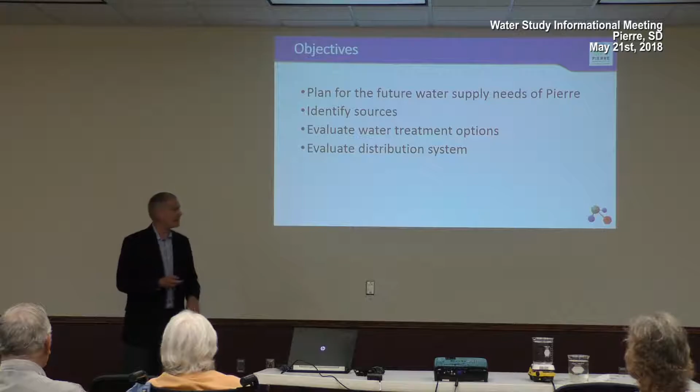Whenever a plan is made, you have to have an idea of how big it should be. The size of a facility is dependent upon the number of people using the water, or the water consumption in the community. So there has to be a planning period. In the case of this study, the planning period was 2045 as the planning date.

Currently the census population is about 13,600 people. Looking at population trends of the community and the county, it was agreed by the team to use a design population in the year 2045 of 16,100 people.

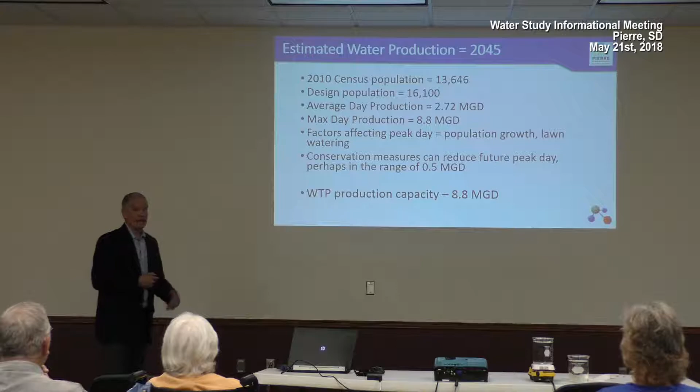At that time, the average day consumption was estimated to be 2.72 million gallons per day, with a maximum day consumption or production of 8.8 million gallons per day.

There are factors that affect that maximum day. You can see the maximum day is almost 3 times what the average day is. The main factors that affect that would be population growth, but primarily in this community it's the summer water use - it's the lawn watering that occurs during the summer that causes a peak demand.

As part of the teamwork, we discussed what can be done to try and reduce that peak day demand. We discussed various conservation features that could happen in the community to manage water demand, which could reduce that peak day anywhere between 0.5 and 1 MGD, just depending upon the policies put in place to manage water demand.

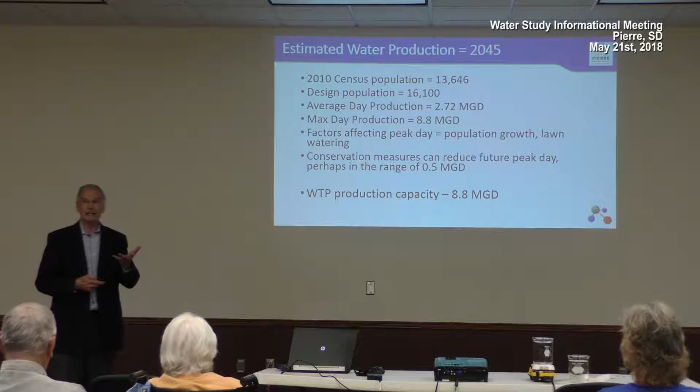But in the end, it was determined to design the peak demand for the water treatment plant, the peak production, to be 8.8 MGD. A part of the evaluation is also to look at the capabilities of the existing system. The city of Pierre has 12 wells located along the river.

Well 11 is down on the southeast side of town here by itself. There's a series of wells arrayed along the shore of the river near the park system there, and then there's 4 wells out on La Framboise Island as well.

These wells pump water into the lowest part of the distribution system. That's, as you drive through town, you recognize you're sort of on the low part of town. And they pump water into the Harrison and Euclid reservoir. The water level in that reservoir sets the pressure for the lowest part of town.

There are pump stations at both of those reservoirs that pump water to the next pressure zone, which we call the airport pressure zone. The water pressure in that zone is established by the water level in the reservoir at the airport location. There's a pumping station there that will pump water up into the highest zone, or the highest elevation of the community, whose water pressure is set by the water level in the Snake Butte Reservoir.

So there's essentially 3 pressure zones in the community. One down here by the river that's pumped into by the wells. The next one, in this area of town, pumped into by pumping stations at Euclid and Harrison. And then this upper pressure zone serving these folks up here, and also potential new customers out there, pumped into by the airport pumping station.

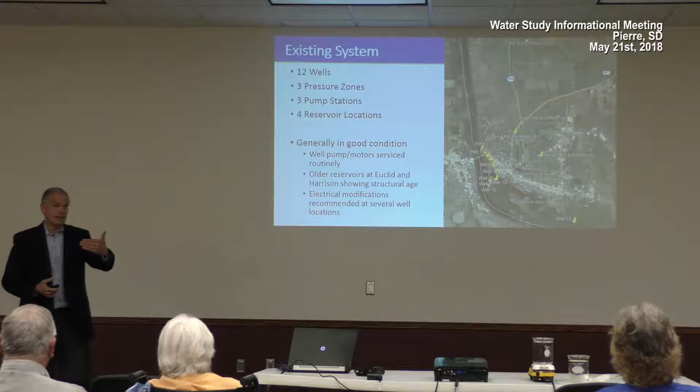As we reviewed the condition of these facilities, we recognized they're generally in good condition. They've been kept well by the community with good operation and maintenance procedures. There's a couple of older reservoirs, one at Euclid and one at Harrison, that show a bit of structural age, and if they continue to be used, will likely need some rehabilitation.

Finally, there was recognition of electrical modifications that should occur at the wells to keep them up to date and enable them to continue operating into the design period if they were continuing to be used. So basically, that's the evaluation of the existing system.

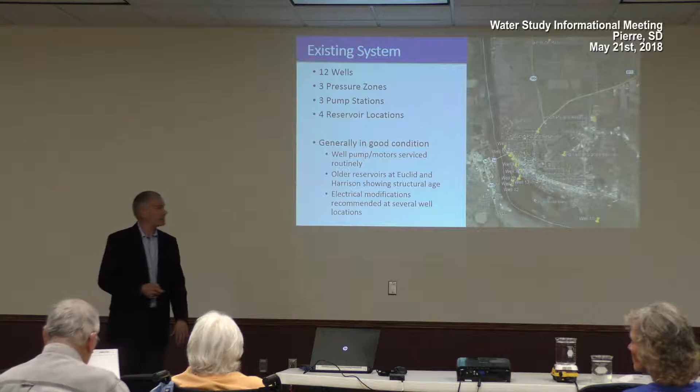We're all curious about water quality, so we needed to summarize that too. There are four main things to talk about: manganese, hardness, sulfate, and total dissolved solids. As water moves through an aquifer, the soil formation dissolves things into the water. Calcium and magnesium, which make up hardness, dissolve from the aquifer material, and manganese and sulfate dissolve as well. These things present in the water result from its history in the aquifer, and all of those dissolved minerals contribute to the total dissolved solids concentration.

It's just dissolved matter. If you put that water on your stove in a pan and let it evaporate, you get a white residue at the bottom. That residue is the dissolved solids remaining in the water—now they've become precipitates, okay?

There is a general trend in the well system here in town to higher total dissolved solids. Wells 6, 7, and 11 have trended to the highest concentrations. In fact, if the wells continue to be used, we would recommend those wells be discontinued and different wells put in place to replace them, because the concentrations are up in the thousands of total dissolved solids.

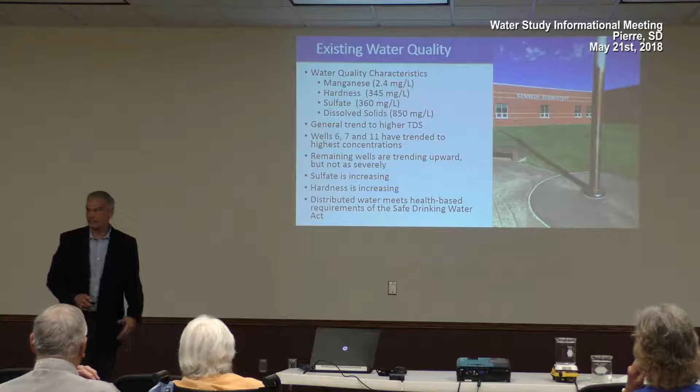However, there is treatment, which you'll see on the next slide, to make the treated water meet the health-based requirements of the Safe Drinking Water Act. So the water is safe to drink in terms of those requirements—it just has dissolved substances that cause it to be a little bit troublesome in some locations for use. So what happens at the wells to make it safe to drink?

There are little treatment systems provided at each well. Fluoride is added at some wells, with the capability to keep a consistent fluoride concentration in the distribution system. There's a sequestering chemical to tie up the manganese and the little bit of iron that's there, to try and hide its presence from the water. It holds it in solution for as long as it can, and eventually, as time goes on, it starts to release—and then you see the released version of that. There's also chlorine that combines with the ammonia present in the groundwater to form a chloramine residual, which is the disinfectant residual in the distribution system.

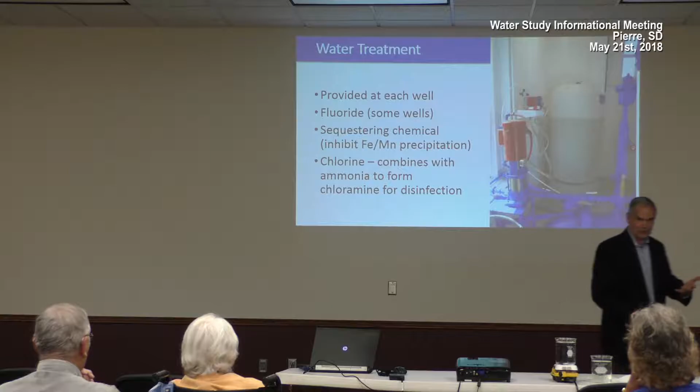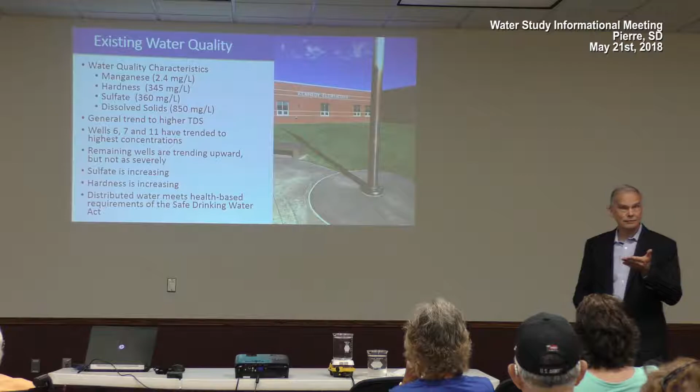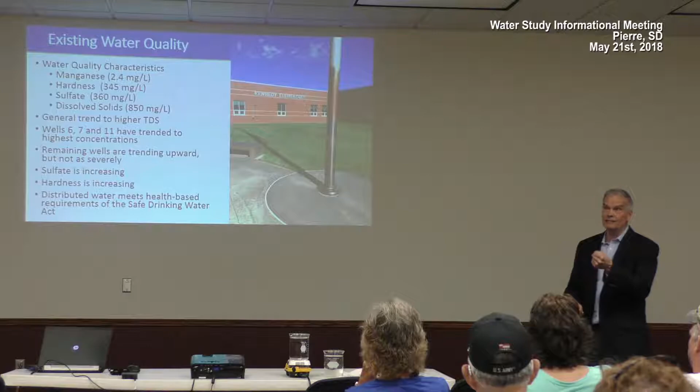Before I go on, I want to show a little experiment to demonstrate—you guys have seen what the water does when you spray it onto the landscaping, you see this brown residue. If we treat this water to remove that, we want that reaction to happen very quickly. We want to create the particles you see inside the treatment plant and make them precipitate so we can filter them—so we're undissolving the manganese very quickly.

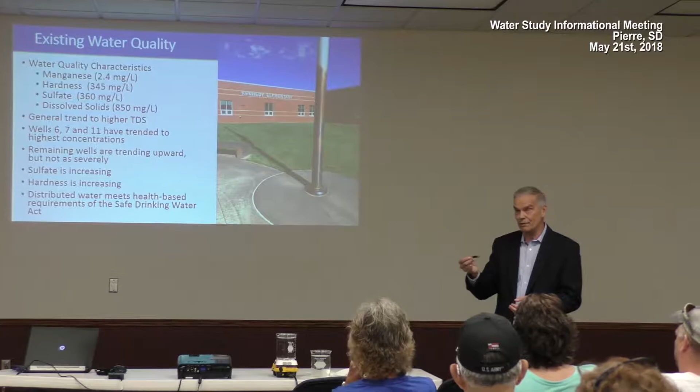One of the chemicals we would use to do that, if chosen as an alternative, is potassium permanganate. So I'm going to take this sample of well water that's stirring here on my stirring plate—it looks pretty clear when you pump it. This was actually freshly pumped this afternoon, right Derek? So it looks pretty clear. If you let this sit out for a day or two, it would start to turn brown, or if you just spray it out over time, you'd see that on your sprinkler systems as well. What I want to do is simulate what we do in a treatment plant to make that happen really quickly.

So this potassium permanganate actually looks pretty nice when you put it in the water, but you see pretty quickly it's going to turn brown. It's oxidizing the manganese, transforming it from a dissolved form to a particulate form. We want that to happen just as quickly as it's happened.

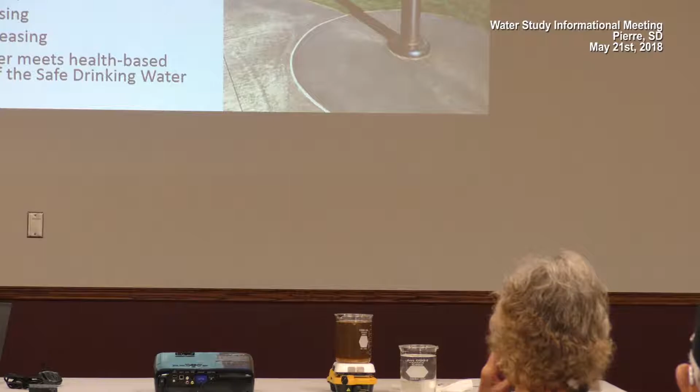Actually, the manganese has already been oxidized here. As we continue to stir it, the little particles of manganese will start to floc together to form larger particles that can be filtered out in a treatment facility. So that's how that would be removed in a water treatment plant, just like we're showing here. By the end of this presentation, you'll see particles that look like they'd be filterable.

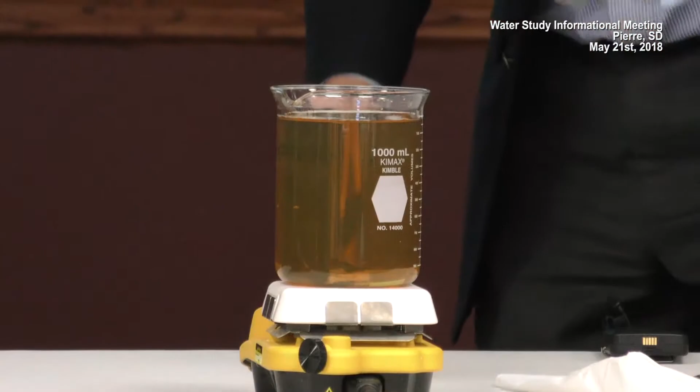Just as a matter of comparison, this is the river water, and you can see it looks clear as well. The river water is excellent quality, and we'll talk about that in a couple of slides. If we would put that permanganate in the river water, it would stay pink because there's no manganese there to react with that chemical, so the chemical would not be consumed. It would just stay pink, and people drinking that would complain because the water is the wrong color, right? You expect it to be clear.

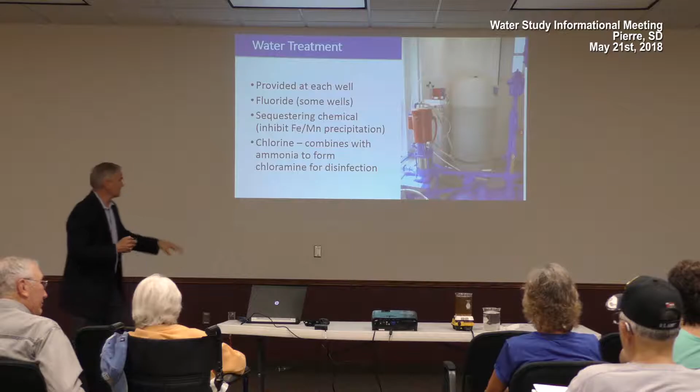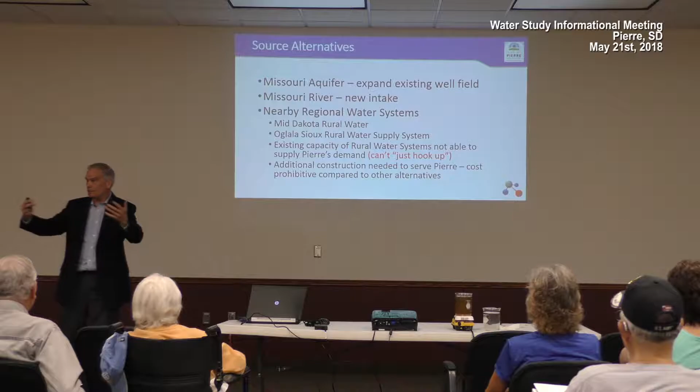So we talked about the treatment provided at each well. There's 3 chemicals that are added to the water. That's really the existing system, how the water is prepared in town and put out into the distribution system.

Our next step was to look at different sources that could be used for the city of Pierre. Of course, you have the existing well field in the Missouri Aquifer. That aquifer is influenced by water levels in the river, and we think there is some recharge from the river as well. But as a result of that formation down there, manganese dissolves, and so you end up with high manganese concentrations. Also, another source might be the Missouri River itself. The city could build an intake and draw water from the river, treat it appropriately in a treatment plant, and then use that, similar to what Mid-Dakota does up north of town, or the Mni Wiconi-Oglala Sioux water supply system does north of Fort Pierre. They both use water drawn directly from the Missouri River.

So what about those regional systems? A question is: is there capacity available? Can they bring water to the city of Pierre? We talked with the managers of these facilities, one being Mid-Dakota Rural Water, just northeast of town, and the Oglala Sioux system north of Fort Pierre. It turns out that the existing capacity of those systems is pretty much spoken for by their own customers. In other words, there's not excess capacity to take water from those facilities and bring it to Pierre.

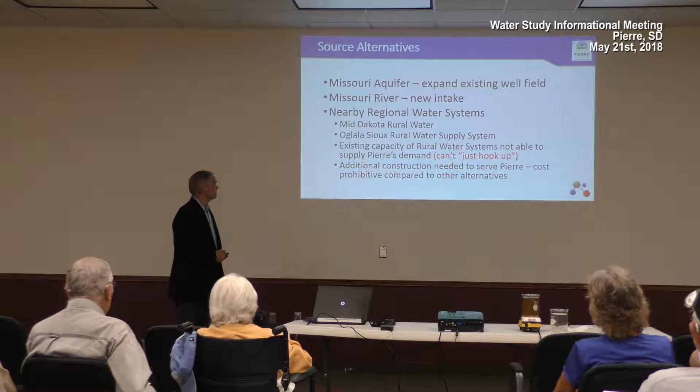All right, so let's compare the quality of the aquifer with the river. I've highlighted the values that we've had before on the prior slide: manganese in the range of 2.4 to 2.5, hardness about 345 - some of you might be familiar with grains of hardness, that's equivalent to about 20 grains - sulfate about 360, and dissolved solids about 850. These numbers you saw before.

This would be the quality of the Missouri River treated and brought to Pierre. If you would take that water and treat it in a water treatment plant of the style we're talking about for the surface water alternative, the manganese concentration would be very low, 0.03 milligrams per liter, much lower than 2.4. The hardness would be about 15 grains.

It varies up and down depending upon recharge to the reservoirs. In the springtime, there's mountain snowmelt runoff that comes down through the reservoir system, and that dilutes the water concentration a little bit. Then as time goes on and that stops and you have rainfall events, there's a little bit of dilution as well. So there is a range of hardness concentrations, historically about 240 to 290, and we're just saying that's about 15 grains.

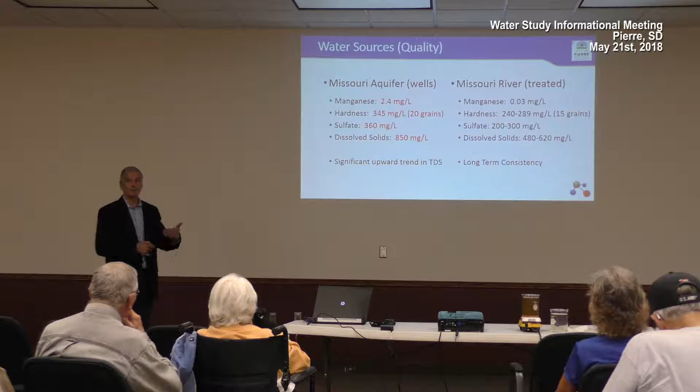The sulfate will range between 200 and 300, maybe 250 is a good average. And the dissolved solids range between 480 and 620, with a long-term average just over 500. So there's really a consistent water quality available from the Missouri River, from the reservoir or downstream of it. Whereas the Missouri aquifer that you're in with your wells has a bit of an upward trend of dissolved solids. If we would take this water...

Either source, if treated, needs to follow the requirements of the Safe Drinking Water Act. There's a whole list of rules that the system needs to abide by, and is abiding by right now. These regulations come in two flavors: a primary drinking water requirement, which is a standard set to protect public health, and a secondary drinking water standard, which is only a recommendation. But those values affect the aesthetic quality of water, making sure it doesn't stink, look bad, or have discoloration and things like that.

A system is required to meet the primary drinking water standards. Some of them relate to the bacteriological quality of water, that's the total coliform rule. The disinfection byproduct rule deals with the consequence of disinfection, since chlorine can react with things in water to form a carcinogen, and that's regulated as part of this rule.

The lead and copper rule influences the amount of lead or copper that could dissolve from somebody's home plumbing, like lead solder, a lead service line, or copper plumbing. Those can dissolve in aggressive water, so the lead and copper rule is there to protect systems against that and to make sure a public water system doesn't produce water that's aggressive or corrosive.

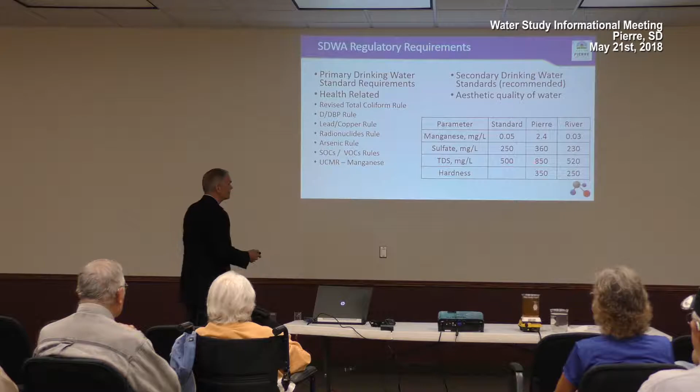The total dissolved solids will contribute to a taste in the water. It can also cause residues to be left, an excess amount upon evaporation if you're washing your car. Their suggested standard is 500. City of Pierre's water is currently at 850, and the river water is about 520, just over the standard. As a matter of comparison for hardness, for which there's not a secondary standard, City of Pierre water is 350, and the river water is about 250.

Again, these standards are secondary standards. They're not required, they're recommended. A community can choose to meet those standards as a possibility for water quality. It's totally up to the community.

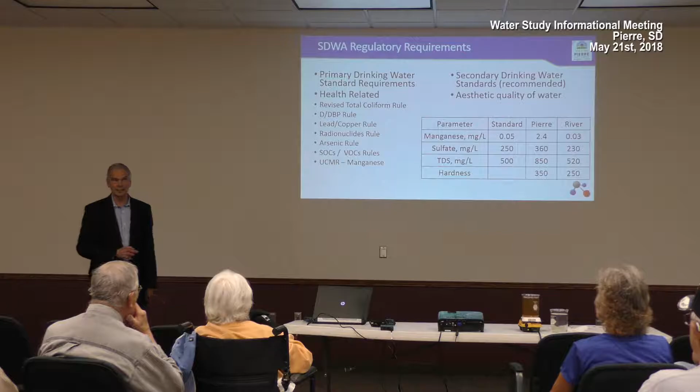Whereas the primary standards are required, and the city must meet those.

Let's come back to this UCMR - it stands for the Unregulated Contaminant Monitoring Rule, and it's the fourth version of this rule, just coming out here. It's in the time range of 2018 to 2020, where systems under this rule will collect samples. There's about 30 parameters that systems will sample for, and one of them is manganese. So Pierre is required to comply with this rule and collect samples for the parameters that apply to them, so they'll collect manganese samples in this 2018 to 2020 time span.

The EPA will take those data, along with other data related to public health concerns related to these parameters, and decide whether or not to regulate that parameter. That data will be used to inform future regulatory actions to protect public health.

So what are the questions they're asking? Well, would that contaminant have an adverse effect on human health? Second question, is the occurrence and concentration likely to cause public health concern? And then finally, will regulation reduce the risk for public water system customers? So if high concentrations increase the risk for a public health issue, then what is necessary in terms of regulation to reduce that risk to an acceptable level?

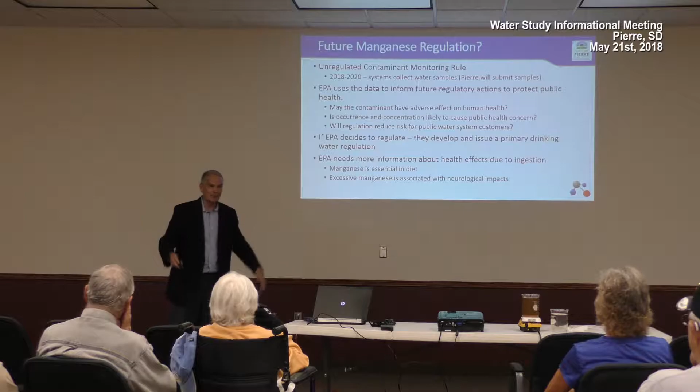In addition to that, the EPA has developed a health advisory level for manganese. They do this periodically for substances that are in the regulatory process. They've developed a health advisory, and there's information about that on the Pierre website - if you look at the water treatment plant section there's information about that. Their health advisory information's been out for quite a while, so if you need more information, want to read into this more, I don't have much more time to talk about this today, but you can certainly get that information there.

Okay, so here we are looking at alternatives for putting a treatment facility in Pierre. If a treatment facility is to be built, where could it go? There were 5 sites that were vetted by the team, the Pierre and AE2S team. One was up north of town, up by the firing range on property I think owned by the city, very near the Snake Butte tank. It would be a great site for a surface water treatment plant, obtaining the water from the river over here.

There's another site located just north of the furthest north residential area along the river. There's a little mesa up there - that's a potential site. And of course the intake would be just down the hill, pretty steep hill quite frankly, from there. So that's how that site would work again for a surface water treatment alternative.

And then there were 3 sites that were reviewed here in town. One is west of the Ramkota - we call it the Ramkota site, on this little green space right here. Then south of the bridge, we call this the Steamboat Park site, Site 4 - there was a space potentially for a treatment plant there. And then Site 5 is a nearly bare area just south of the Discovery Center on a lot there. Quite frankly, this site was very small, and because of its smallness would have been difficult to build a facility on, so it didn't receive a lot of favorable rankings.

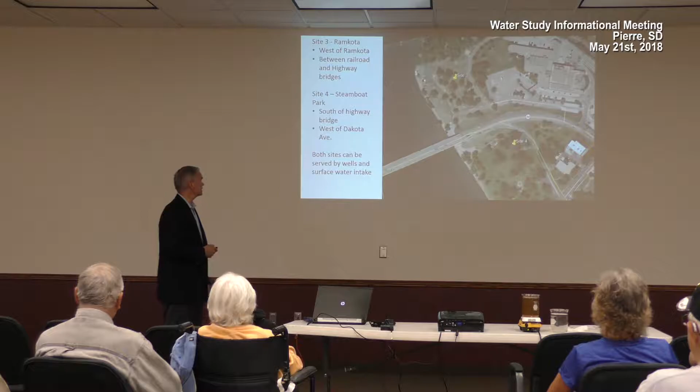So in the end, after all of this review, what would be the requirements for a treatment facility? One would be that it has to meet the requirements of the Safe Drinking Water Act, the primary drinking water standards to protect public health. The capacity of the facility must meet the design flow required for the system, meaning it has to treat water to produce 8.8 million gallons per day.

Finally, based upon public input and discussion amongst the team, it was decided that the treatment alternative must be capable of eliminating the discoloration from the water, to provide treated water with manganese less than 0.05 milligrams per liter. Quite frankly, this is very common for communities like Pierre to make a choice to do.

It's pretty normal across South Dakota to remove iron and manganese from water sources that contain it. For example, Brookings has high iron and manganese in their water source and has an iron and manganese removal plant. Aberdeen has a well source with iron and manganese, and their treatment facility handles that too. Watertown, same thing. The city of Huron is unique in that it has 2 water sources.

One is the Mid-Dakota system - they got into the planning stages early on, so they're part of that system. But they also have a groundwater facility that takes water from the Warren Aquifer, so they have a manganese and iron removal facility there too. It's very common for communities to choose to remove iron and manganese from the water. In fact, across South Dakota, it's more the normal than the non-normal for a system to do that.

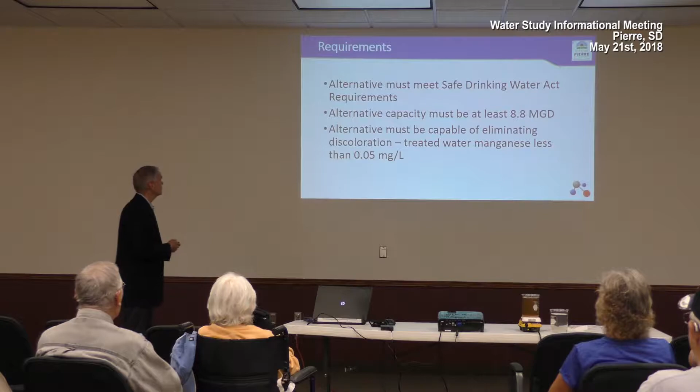So it was reasonable, based upon the Pierre community's desire to remove discoloration, to have the treated water manganese meet the secondary standard.

Given all of that, 3 different treatment alternatives were developed. One was to take the well water and remove the manganese using a process similar to what we started here - a chemical is added to oxidize the manganese to create particles that are then removed in a filter, a granular media filter typically used for public water supply. This would remove the brown color, but not remove any hardness, sulfate, or total dissolved solids - mainly focused on getting rid of the discoloration, which was a requirement.

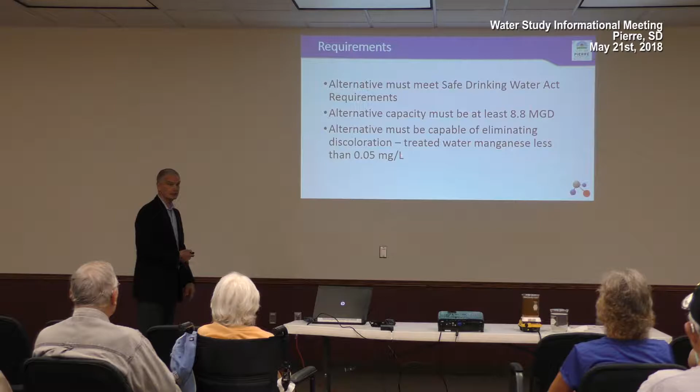A second alternative is to take that well water and do one additional treatment step: run part of it through a reverse osmosis system to remove some of those dissolved solids, and blend that RO-treated water back in with water that's been treated only for manganese removal, to achieve a water quality that matches up with the river water quality - a little bit of hardness removed, a little bit of sulfate removed, a little bit of dissolved solids removed, to match the river.

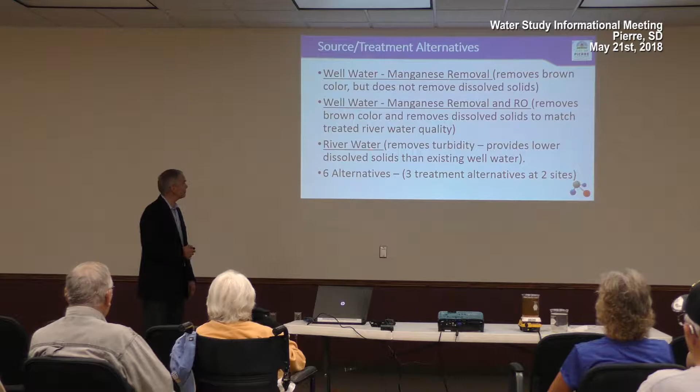So essentially you have 2 alternatives here, with the last one being a river water system that would produce the same water quality - one using the well water and the other using the surface water. The last alternative is to take the river water and just remove the small amount of turbidity that's there through a filtration process, then bring it out to the distribution system. This is different from the first alternative in that this water will have lower dissolved solids, lower hardness, and no manganese in it.

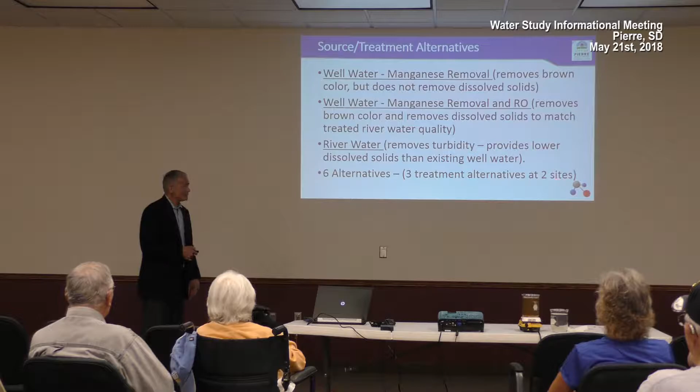Because there are 2 sites at which each of these 3 different processes could be developed, there were essentially 6 alternatives - 3 treatment processes at 2 different sites.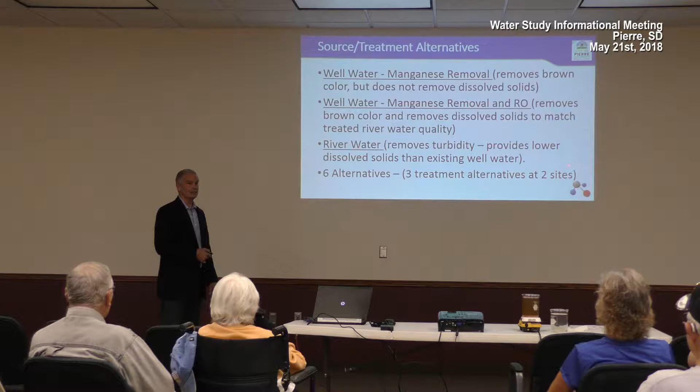Our team's job was to evaluate the costs of those alternatives. We look at this like the cost of you owning a vehicle. You buy it, new or perhaps newly used, new to you. Then over time, you do maintenance on that vehicle, so there's costs associated with the maintenance as well as the initial purchase cost. And at the end, it might have a trade-in value. We call that a salvage value.

In order to compare all of these against each other, we have to convert all of those costs to what we call a present value. It's called a present value cost analysis. It enables us to compare all the alternatives on an apples-to-apples basis. Some alternatives may have a higher construction cost but a lower operation and maintenance cost. You have to be able to compare that against an alternative that has a low construction cost but a really high operation and maintenance cost to find out what your real costs will be over time.

So that's what this was. In the end, the team went through an evaluation of that cost analysis, but also an evaluation of the pros and cons of each of the alternatives. This was a fairly extensive workshop that we went through with the City of Pierre folks to have them weigh in on their opinions on the pros and cons of each of these alternatives.

In the end, the team chose alternative number 6 as the recommended alternative, which is to build an 8.8 million gallon water treatment plant at the Steamboat Park site. That is a surface water treatment system using a process called ultrafiltration to remove the particles, organisms, and so forth that are in the surface water, disinfect the water, and bring it out into the distribution system.

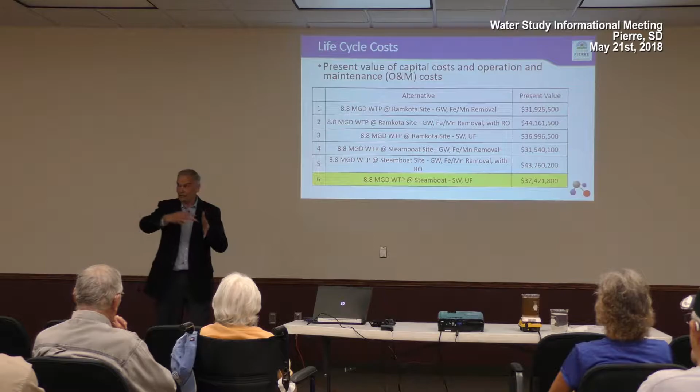The present value cost of that's about $37 million. Turns out that that's the construction cost too, about in that same ballpark, around $37 million to build it. Then if you look at the cost over time of maintenance and the salvage value brought back to the present value, it's about $37 million as well.

You might ask, well, what if we don't do anything? What if we continue on with what we have right now? Well, there's costs associated with that. As the city grows, you need more wells to meet the water demands of the community and little treatment facilities associated with that, each well. There's some wells that were recommended to be abandoned because of the bad water quality, so you need additional wells to compensate for those. And then you have to maintain and operate those existing facilities.

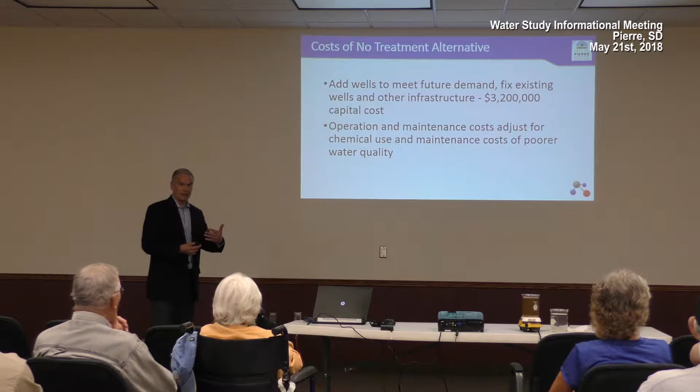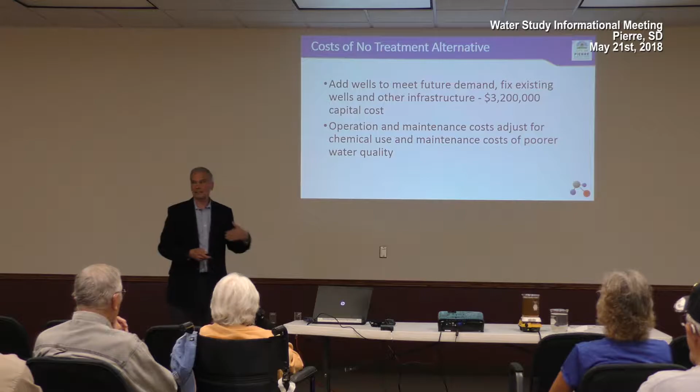Actually, the chemical usage, the cost for chemicals, doing treatment that way is actually more than the surface water treatment alternative, just because of the cost of chemicals that are being used to do this. So all of those are adjusted into looking at the cost of that system. Toward the end, when we look at what the cost will be to you as a consumer, we'll compare this cost against the cost of the recommended alternative.

So what does this all look like if you were to move ahead with that surface water treatment alternative? There would be an intake screen submerged in the river north of the railroad bridge with a pipe bringing the water to an intake building that has pumps in it that would take that water and pump it to a water treatment plant located down here in Steamboat Park. There would then be a treated water pipeline that would be connected into the distribution system at strategic locations in order to get that water into the distribution system.

So those were all elements of the total cost of this alternative: the actual screened intake in the river, an intake pumping station, and a water treatment plant.

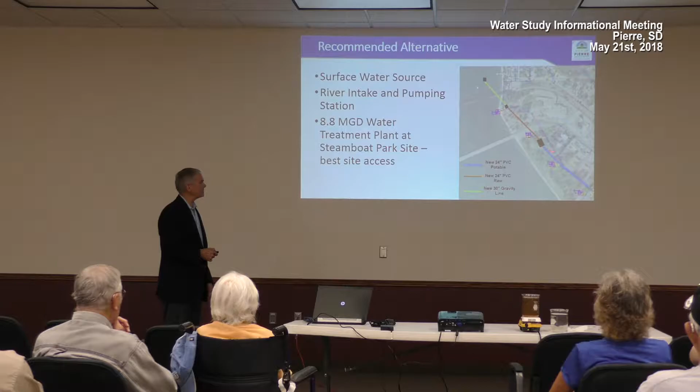Just to get a feel for what that might look like, the yellow rectangle on here is about the size of the water treatment facility, about 100 by 150 foot building. You can see this is the Discovery Center here, I think it's about 80 by 100 or so, so it's a little bit smaller building. Here's the chamber building right here, of course we're much smaller than the Ramkota, and we've just put it on here to represent the size.

The actual location of the building could be moved to fit the site, however that all gets designed in place. There'd be parking and a little turnaround associated with the building as well. There'd be some additional space, about an acre, little more than an acre, maybe an acre and a half.

Sorry. That's okay. I know when I'm supposed to stop, right?

Notice here there is the river, the road that goes over the river, the bridge, and Dakota Avenue that's an off-ramp right now. As part of the construction for the new bridge, that Dakota Avenue ramp is going to go away, it won't be included in the new bridge. The new bridge ramp is over on this side, and the bridge gets built over here. So that's another change that will happen to Steamboat Park: the Dakota Avenue ramp goes away.

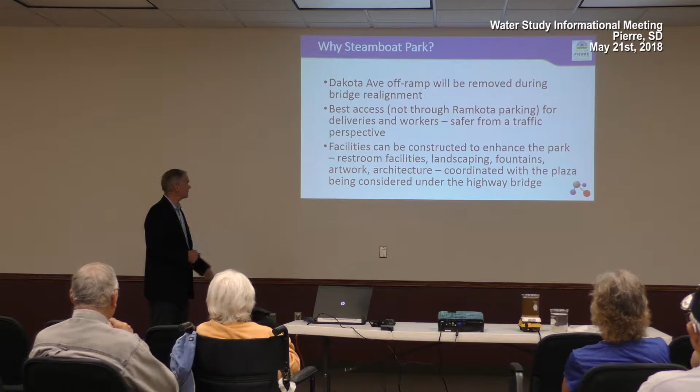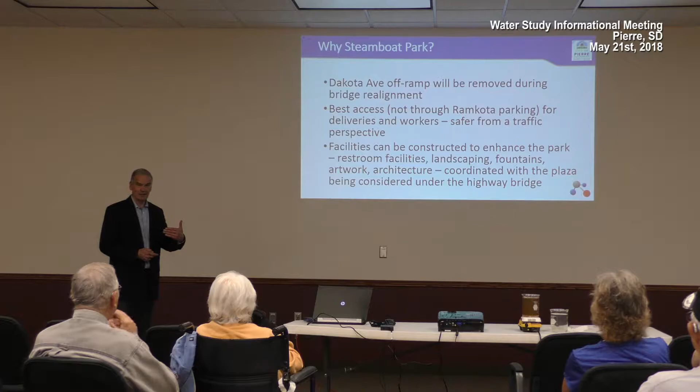We can add in facilities like restroom facilities or landscaping, potentially fountains, artwork. Just the treatment plant architecture itself can be used to blend in with buildings in the area, like the Discovery Center, if that's a desire. So architecturally and landscaping-wise, and I'll show you some pictures about this in a second, we can enhance the presence of the treatment facility in the park by constructing it properly.

Okay, so that's the site. Just as a reminder, that site was chosen because not only was it economical, but it had some safety advantages associated with it in terms of moving to and from the treatment facility, and would have been the lowest cost of the alternatives that were considered in terms of site access.

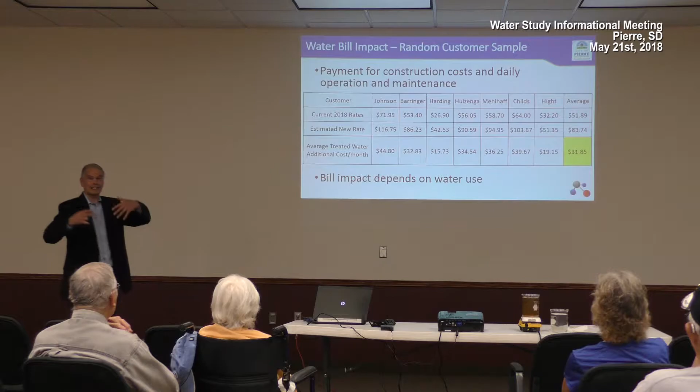Okay, finally, what's it going to cost? As is the tradition of the community, Brad goes ahead and looks at the impact of rate increases on folks that live in the community, choosing some of the folks that are on the commission and work inside City Hall. So this would be the current 2018 rate, the average water rate for the monthly water bill averaged out over a year for these folks, ranging from $26.90 average up to about $70.

If we look at the new rate that would be applied, here we're talking about what is the cost of the facility to build it and to operate and maintain it. So the construction cost is included in this cost factor, that's payment for that construction loan essentially, and then also payment for daily operation and maintenance. That gets paid for by the people using the water.

So the proposal is to adjust the water rates to enable the costs of water treatment and the costs of the treatment facility to be paid. We did a rate evaluation using a blend of putting some of the cost on the base charge and some of the cost onto the variable charge, the cost per amount of gallons being used. The estimated new rate for these folks, on a monthly average, is in this range.

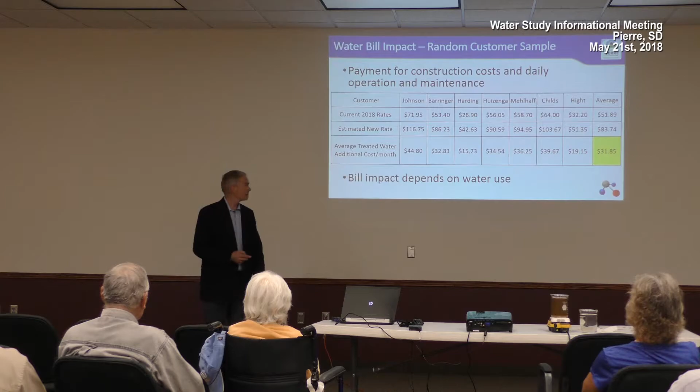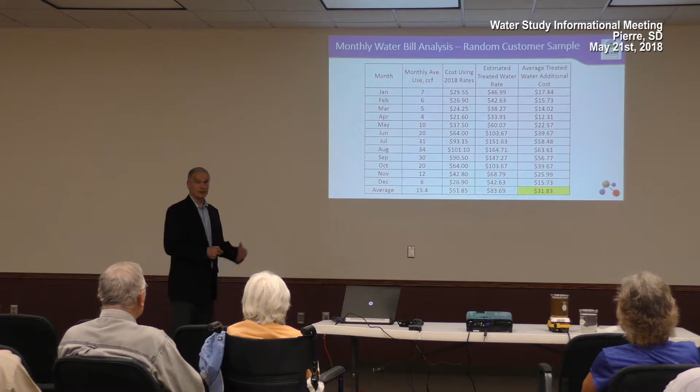And again, that average increase for treated water across all of those months would be about $30. You can see during the summertime when they water, the water bill goes up as a result of accommodating that additional water use. So to summarize, for a residential customer using approximately 800 cubic feet per month, which is about 6,000 gallons per month, the water bill would increase by about 60 cents per day.

On this random user analysis that was supplied by the community, by the folks at City Hall, that water average of those uses is about $1 per day.

And your question is, well, what if we don't do anything? Well, you still have to add those additional wells as time goes on, and do enhancements and fixes to existing facilities. We estimated that in order to accommodate that over the time period as well, your water bill would increase between 15 to 25 cents per day as time goes on.

So we're looking at, under a no action alternative, which simply means continuing with the existing approach, you still need to make improvements to the system, somewhere, let's say 20 cents per day. If you add treatment, a lower end user might be in the range of 50 to 60 cents per day, or an average across the community, an average of those users in the City Hall example, about $1 per day. You understand that the amount you're actually going to need to pay depends upon how much water you use.

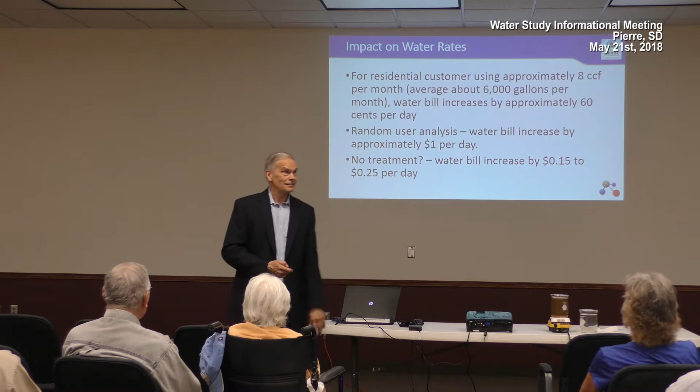So then the question is, what does that look like compared to other community systems? This is Pierre's current monthly water bill, assuming 6,000 gallons of water use per month. It's about $32.25 per month. If you would do treatment with the proposed rate increase, estimated, it'd be about $51 per month. That difference is about $19, on the basis of about 6,000 gallons or 800 cubic feet per month.

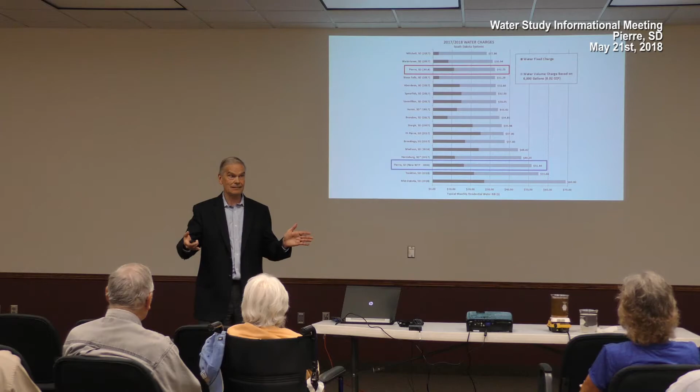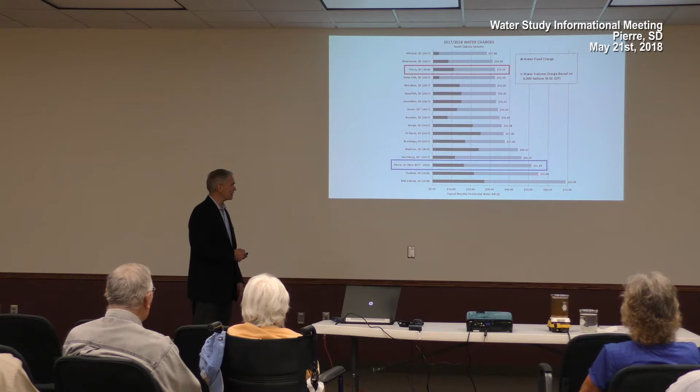What do some other communities look like? Here's an average bill for Brookings, about $37.60. Harrisburg, $46.20. Yankton, $55 a month. Yankton is under construction to add their treatment plant, and so they've made adjustments to their water rates to get to where they are today. Their treatment plant is nearing completion right now. So if you look at a community about the size of Pierre that's moved forward with treatment compared to the city of Pierre, it's about in the same ballpark.

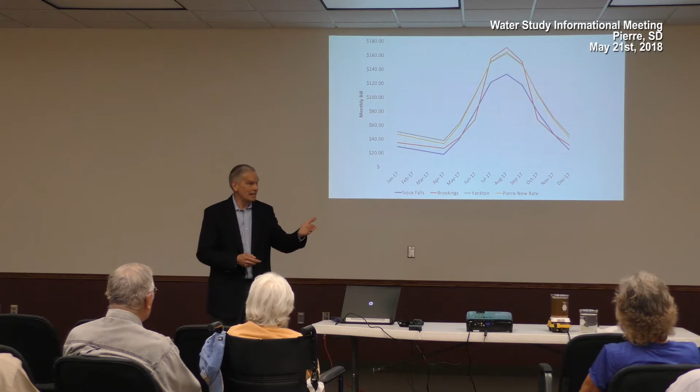You can see that Yankton, which is in the gray, and Pierre would compete with each other in terms of what that rate might be. The point is that implementing this is not going to cause Pierre's water to be unusual relative to other communities that have a similar water quality to what Pierre would have. Okay, so we're down here to the end.

Now, what are the benefits of that treated water? Well, it would eliminate the discoloration. We wouldn't have the issues with brown sidewalks and brown laundry and other water treatment issues associated with manganese in the water. This water would also meet potential future manganese regulation. We don't know the fate of the regulatory progress that's going to go on, and so there's a high likelihood that this water would meet the future manganese regulations.

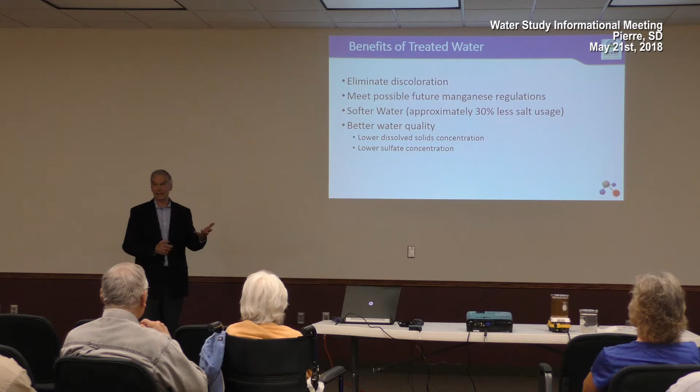The water would be softer, about 30% less hardness in it, which would reduce your salt consumption by about 30%. If your water softener's salt regeneration is regulated by the amount of water used and the hardness of the water. And then finally, you'd have better water quality, a lower dissolved solids concentration and a lower sulfate concentration. We talked about the benefits of that a little bit earlier.

Continuing on, less water would be used by the community for main flushing. Right now, the community responds to colored water complaints and flushes the system on a routine basis. If that deposit isn't going to be put into the system, then there would be less flushing required as the system continues to use this better water.

There would be decreased water main deposit buildup. Right now, the deposits build up inside the water main and decrease the size of that water main. So eventually, as time goes on, the effective size and flow carrying capacity of the water mains in town are decreased. By providing better water, that issue goes away.

And then finally, this water would be less corrosive or encrusting of plumbing fixtures and appliances. It's pretty routine to replace faucets in this community when you use the city water directly, and replace water heaters and so forth. There would be less of that because the water would be less aggressive toward those plumbing fixtures.

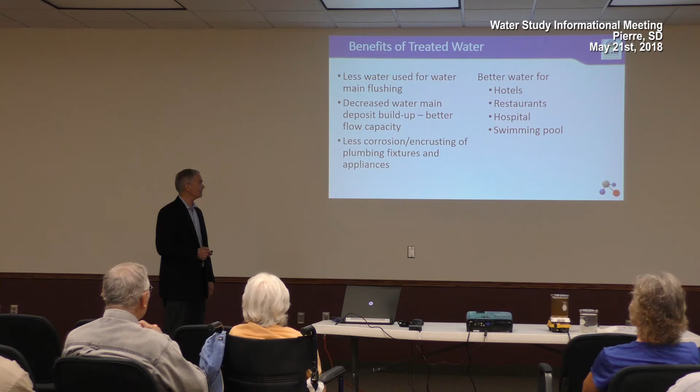And then finally, there would be better water distributed throughout the community for some of the commercial establishments and the swimming pool, including, I guess, there's an initiative going on to look at a new municipal pool. And the treatment of water associated with that pool would be less expensive as compared to what it would be if the city continued on the way it is. Okay, so that's the presentation.